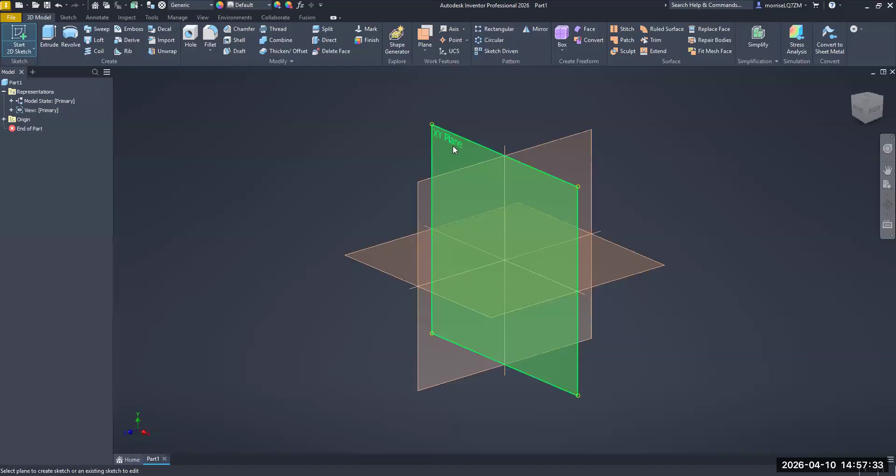All right, so it's finally up, and I'm gonna go to Start 2D Sketch, and I'm gonna click on the XY plane. That's the one that I choose 99.9% of the time. But you can choose whatever plane you wish, because with the view cube up here, for all intents and purposes, you can rotate whatever angle you wish.

I'm gonna go to Circle, Center Point Circle, and I'm going to go to my origin. You see it's going to snap to the origin. It's going to be green. Click it, drag it out. Now, I did this once yesterday for my engineering students. I think I used 4 for the diameter of the shaft. Enter, and I did a right click.

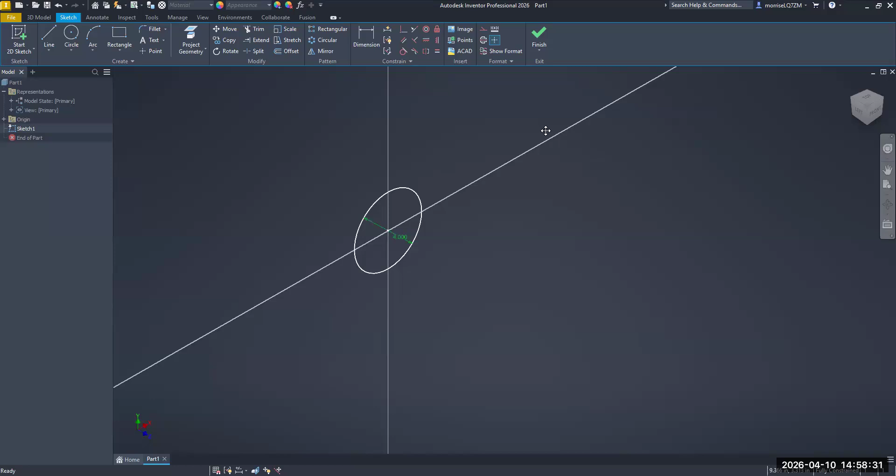Okay. Now you know how to rotate your scroll wheel to zoom in and out, and hold down your scroll wheel to pan. Oops, let me move that out of the way. I'm going to finish the sketch, and I'm going to go to Extrude. And I'm going to make this about 6 inches long. Select OK.

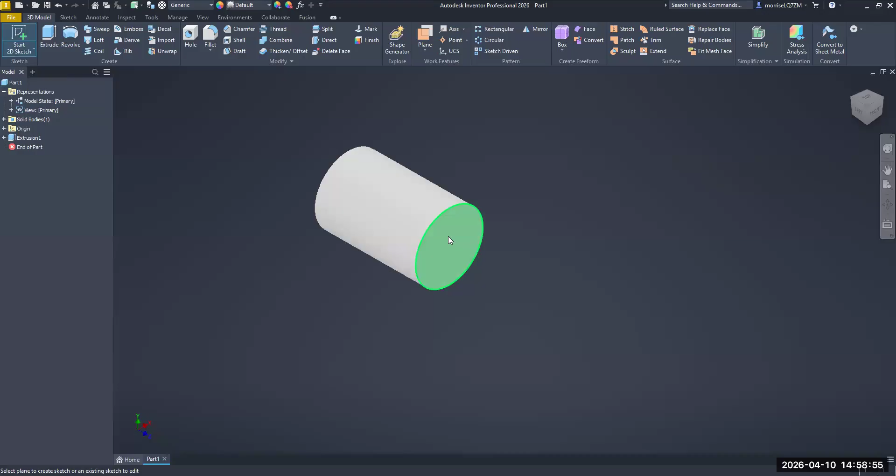All right, now I want to go to Start 2D Sketch, and I'm going to click on this end of the shaft. And I'm going to, again, draw another circle at the center. This is a step shaft. The reason I'm drawing a step shaft is because you can see the greatest stress concentration. That's where the shaft is at its weakest point. And you'll see that when we do the analysis.

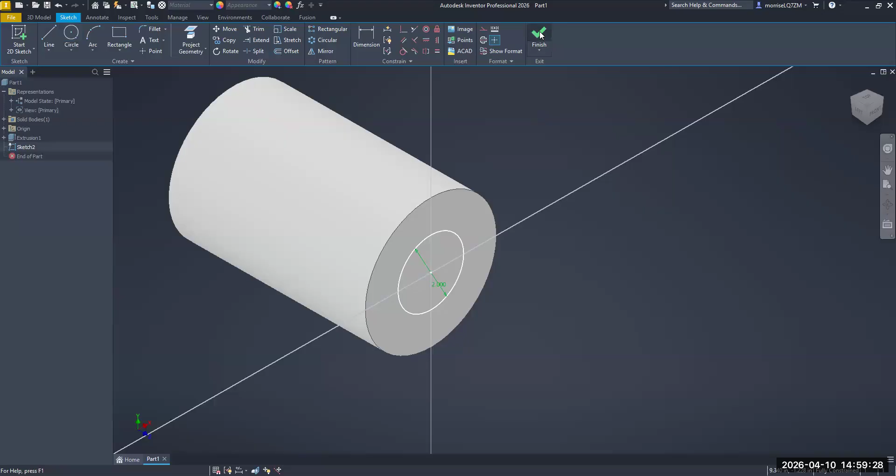All right. So I'm going to make this 2 inches. Okay. And then I'm going to finish the sketch, and I'm going to extrude this. And again, I'm going to leave it 6 inches.

That's nice and convenient. All right, now, for my students here who are going to be engineers one day, and probably most of y'all will end up being an engineer at some point, you notice how we have a sharp corner here? It's a sharp 90. You see that? As a designer, you don't really want to have a sharp 90 sometimes like that, because it makes it weaker. It's not as strong. So one way you can fix that is you can use a fillet.

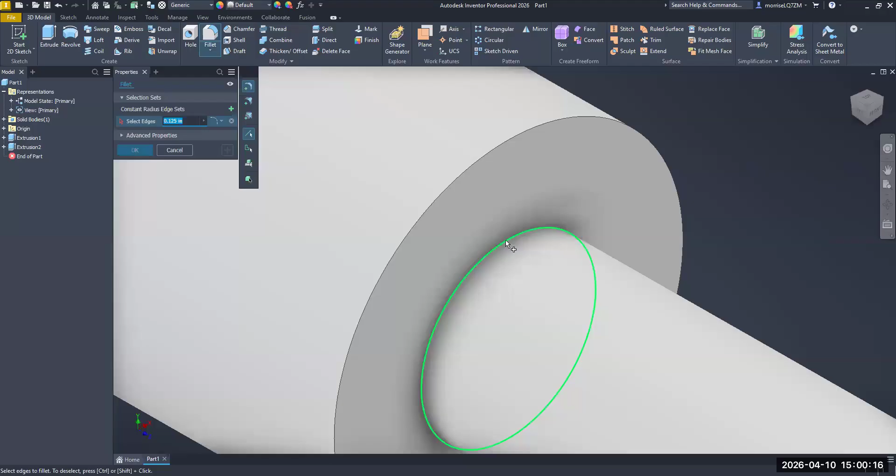Just come and use a fillet, right? And I'm gonna click right here, and y'all have used this before. And I'm gonna select OK. All right, now I'm gonna point out something to you. Why is this stronger than the previous design? Well, look, you've actually got extra material. Look, you come down here. This is what you had before, right? So now you have this little bit of extra material. You see that? And it makes it stronger.

So a lot of times it's in your best interest to not have a sharp corner. Sometimes you have to have a sharp corner, but not always. If you don't have to have a sharp corner, this is probably a better design. All right.

Now, we have this part, a very simple step shaft. I'm gonna go to File, and we have to Save As. And again, you can just call it stepped shaft if you want to. Stepped shaft. Okay. And I'm going to select Save over here. All right. Now this is our part. Sorry, I was kind of favoring this isometric view for some reason.

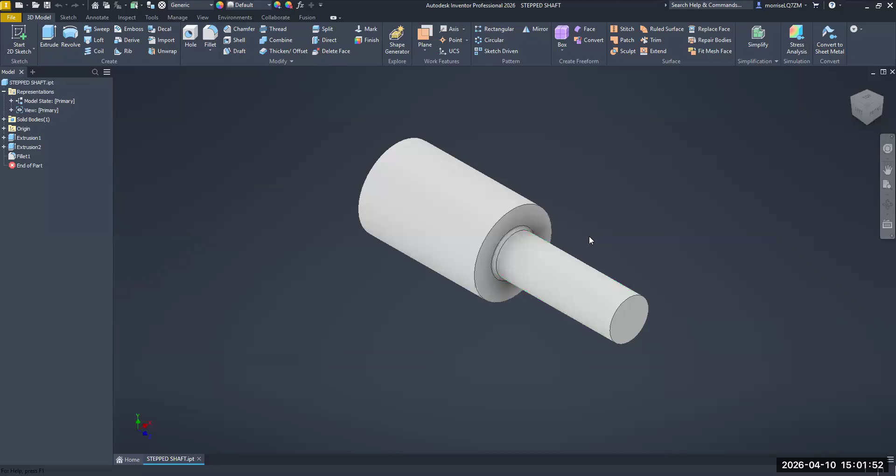You can't do a stress analysis on a part unless you define the material that the part is made of. So in this case, if you were using ABS plastic on a 3D printer, you would select a plastic, ABS plastic, for example. But I'm just going to make mine. Let's say I have a 3D printer or something here that prints metal.

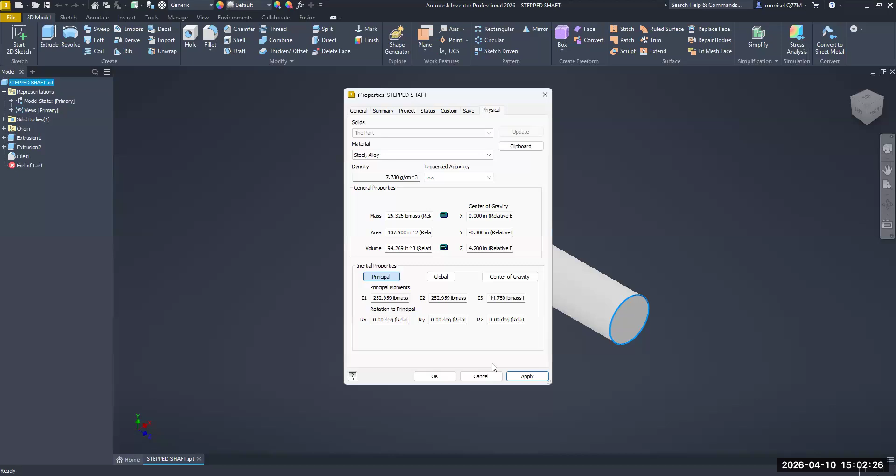I'm going to right click on this, and I'm going to come down to iProperties, and I think all you guys are experts at this now. You can come in here and I'm going to select steel alloy. You can select whatever material you wish. I don't know if you've ever noticed that you get a lot of the mass and area volume properties here. That's also the center of gravity for that part. Okay. And I'm going to apply this and close. Nothing new here. You've seen all this before, and that's great.

Now that I have the material defined, I want to do a stress analysis on it. So I'm going to come up here to, this is new. So you might want to take some cheat notes or shorthand notes. Go to environments. When you go to environments, over to the far left, you'll see something called stress analysis. Click on stress analysis. And then select right here to the left, you're doing a study.

Now, for right now, this panel is more involved, beyond the scope of this class, but we are doing a static analysis here. So everything is fine for right now. Basically, just check off static analysis and select OK. So basically, you're accepting the defaults here.

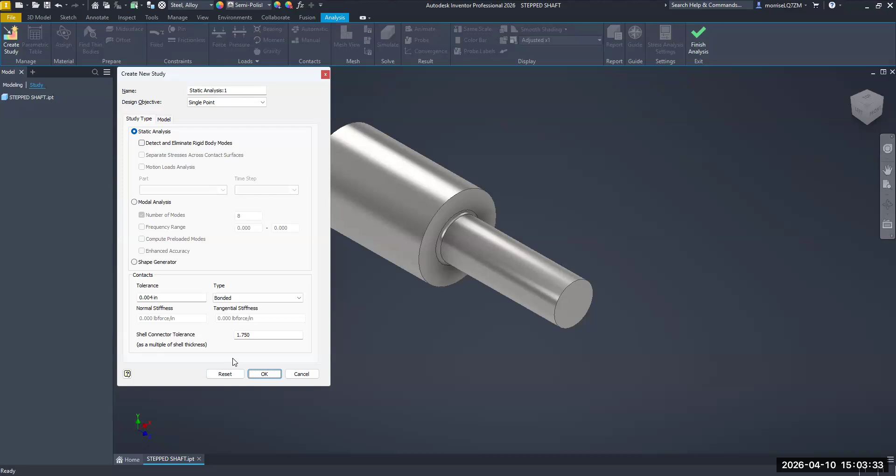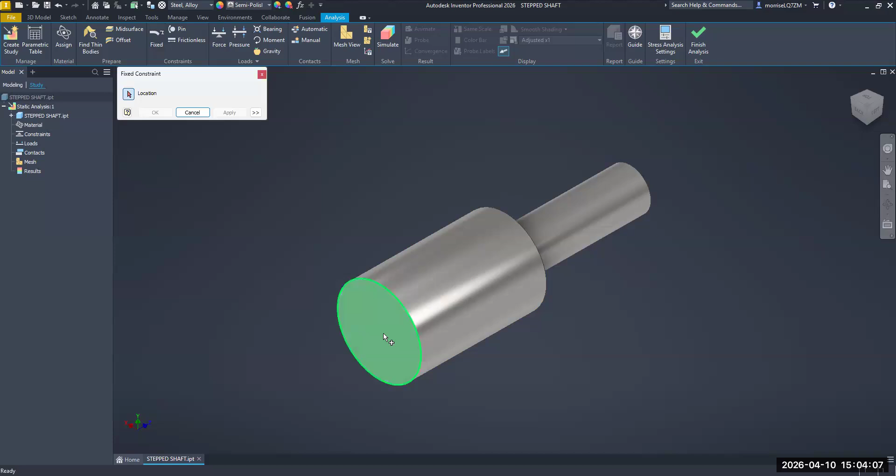All right, now I'm going to do a couple of things with this shaft. The first thing I'm going to do is a tensile test, which means you're pulling on the part, okay? And in order to do this, I have to fix this end. So there is an icon here called fixed. You're constraining it, right? So click on fixed. And if you click here it looks like a little Band-Aid.

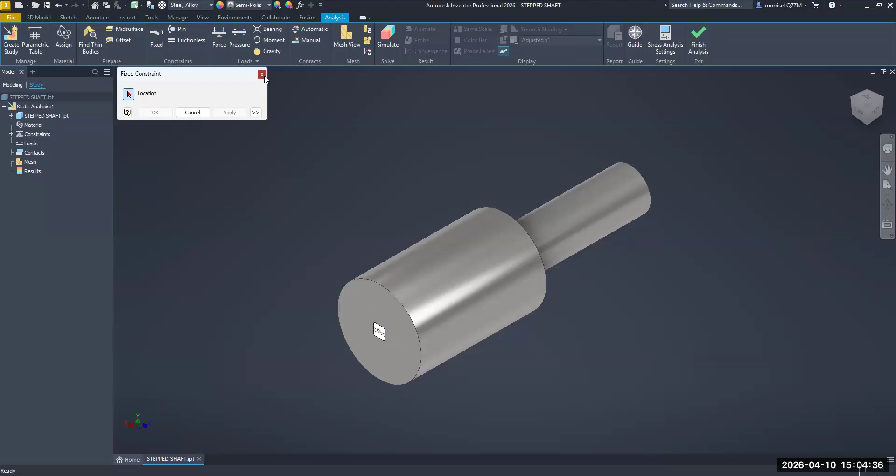What that means is that might be welded to a bulkhead. It could be firmly secured where that's not the weakest point, right? It's welded or it's secure where it cannot move at all. All right, I'm going to select apply. And I'm going to close this out. So there's the little bit. This is fixed.

Now, I want to come in here and apply a mesh view. Now, this would be like if you ever take a class called finite element analysis, you have to break up your part into individual finite elements, which is the grid here. You see a grid? All right. Now, I want to apply a force here at this end. I'm going to do a tensile force first, which is you're pulling.

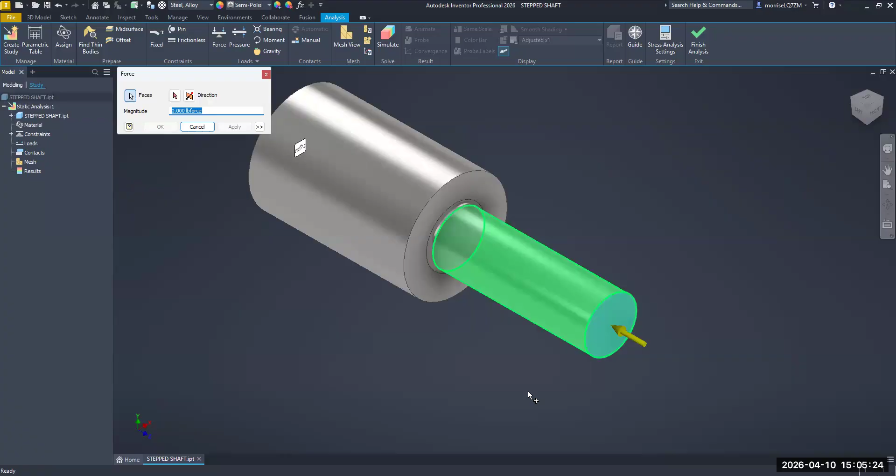So I'm gonna go to force. I'm gonna click right here. All right, now you see the arrow right now is pushing on the part rather than pulling. I'm gonna flip the direction, and I'm gonna put on here a force of maybe 1,000 pounds.

So y'all have taken statics, right? Most of y'all have taken statics in here at some point. Okay. So you understand the meaning of stress. I'm kind of stressed today, but not mathematically stressed.

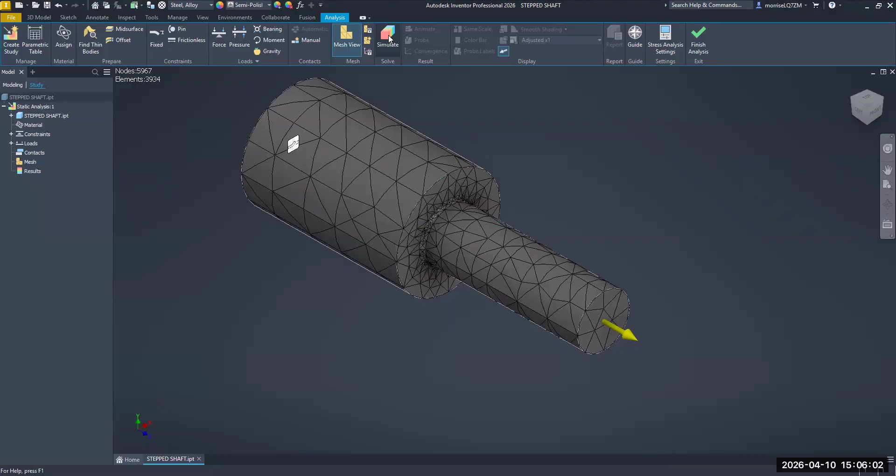Apply and select this. All right. So here you go. Here's the mesh view again. Here's the force. Now we can do a simulation here. Run. All right. I want to show you something. This is called the von Mises stress. For right now, I just want you to look at the color code. The red is the greatest stress that the part's going to see. And it's not too terribly bad.

Okay, so it's 0.6132 KSI. So you have to multiply this by 1,000. All right, so 613 PSI. But now you can do an animation of this. You click on animate, and you can record it as well if you wanted to record your animation. Click here. Select OK.

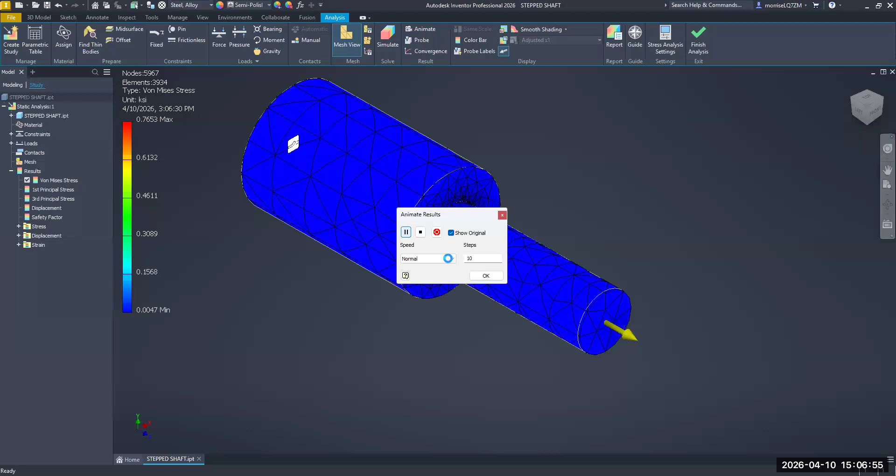I need to do it. Hang on just 1 second. That's it. So it's pulling it, right? It's pulling it. So if you haven't seen this before, this is a very good tool to do some sort of stress analysis on a part.

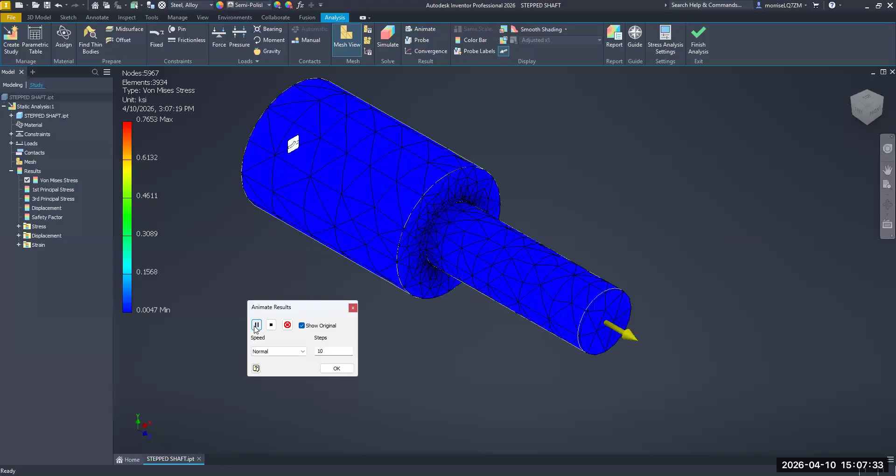Okay. Now, the beauty here is, Mr. Alfredo, you're famous now because your name is mentioned in the video, right?

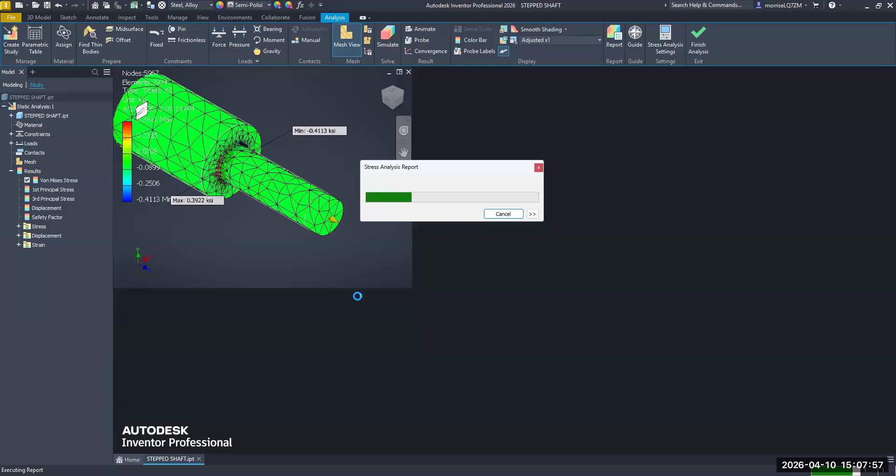If I wanted to create a report here of what I just did, if I come up here to report and say okay, it's generating this nice report that I can submit. You can even put it into a PowerPoint. You can create a PowerPoint and clip all these images and put it in there, okay? It's a slow computer, but, all right, come on, almost there.

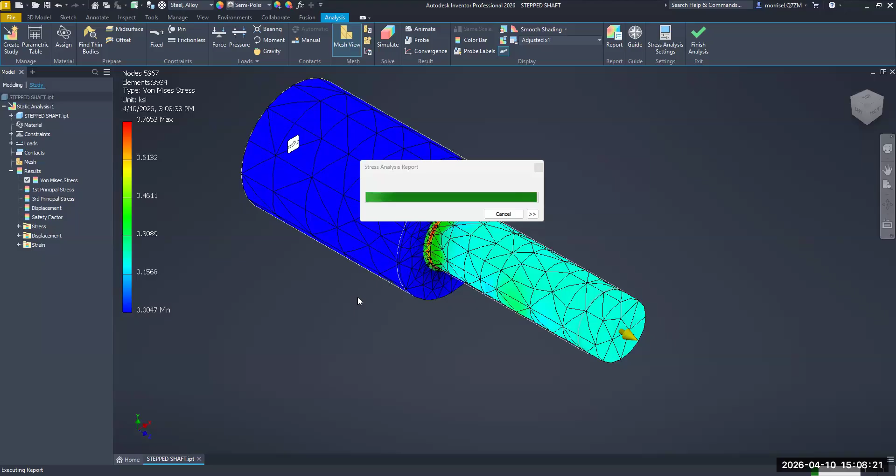All right, look here. You can scroll through this. It gives you all the information about your part. Isn't that cool? Back up here, it gave you what? The designer, the date, material, density, mass, area, volume, the element size of the mesh, material designation and its properties, Young's modulus of elasticity. You have all these pictures that you can cut and paste.

Look, all right, here's all your stresses. Again, this is more for a higher level course, but I think you'll have an appreciation for this later. So you can do a stress analysis of a part. All right, I want to show you one more. I'm going to close out this.

Oops. Wait a minute. Did I close out my Zoom? Please tell me I didn't do that.

All right, I want to stop the share for a minute. Thank goodness I'm still recording. Okay, am I still recording? Yeah, I'm still recording. All right, I'm going to share my screen and go back into Inventor. Sorry about that.

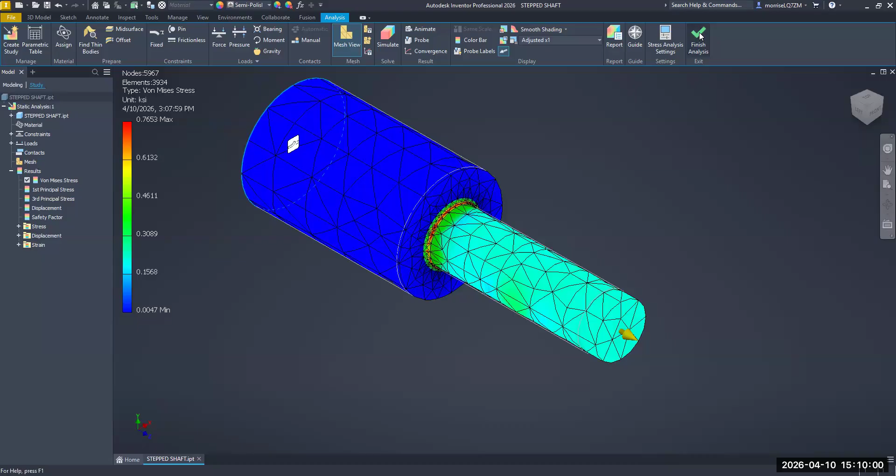All right, so I'm going to finish this analysis. I'm done with this one, right? I would like to do another analysis on this shaft. So I'm gonna come here and go to environments, stress analysis. I want to delete this force. It's gone. The fixed end, I'm going to leave the same here. I'm going to leave the fixed end right here. See that? There's the fixed end. It's still there.

Again, we have our file name. All the material properties are in place. This time I'm going to do torque. So I can click on this end, and you can change the direction. So you're applying a torque, a twisting motion, torsion, right, to this part. And let's say we want, I don't know, 1,000 inch-pounds here. Okay, so force times the distance, right? Force and the distance here. So that's the moment or the torque here. All right, say okay.

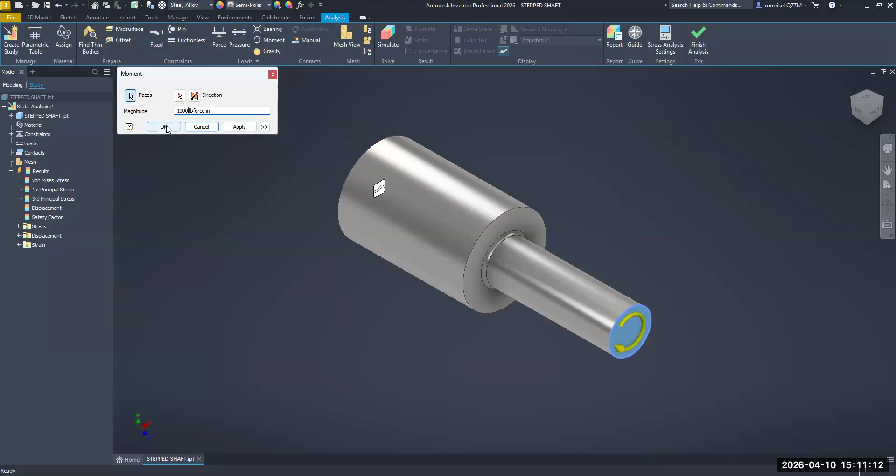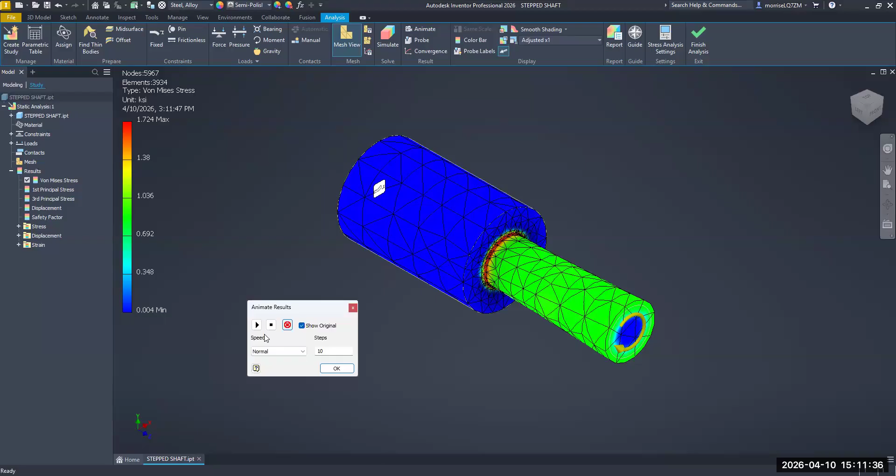I want to turn on the mesh. I'm going to simulate, run. All right, so you see the red again, that's where you see the stress is, like it was earlier. But if you want to do an animation, click on animate. And you can see it's twisting. Okay.

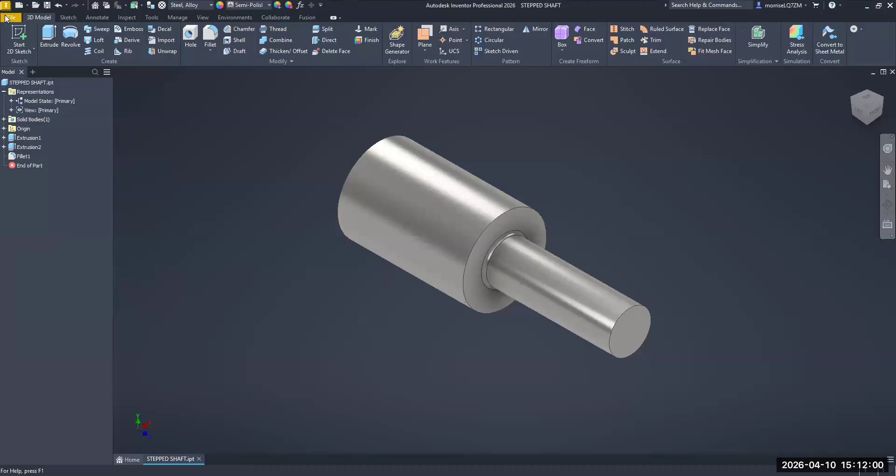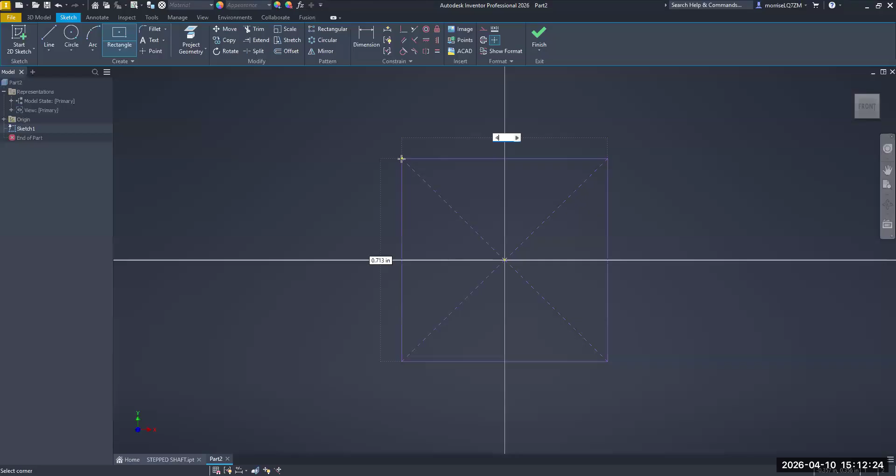I'm going to do one more here, and then I'm going to print out some parts for some 3D printing students. I'm going to close it, finish the analysis. I'm going to go to File, New, English, Standard IPT, Create, Start 2D Sketch. Click on the XY plane. I'm going to go to Rectangle. I'm gonna make this a 4x4 cross section. Do a right click, okay, scroll out, finish the sketch. Now I want to give it some depth. Extrude. We'll go to other direction. Okay, so nothing new here. You've done this before. Start 2D sketch.

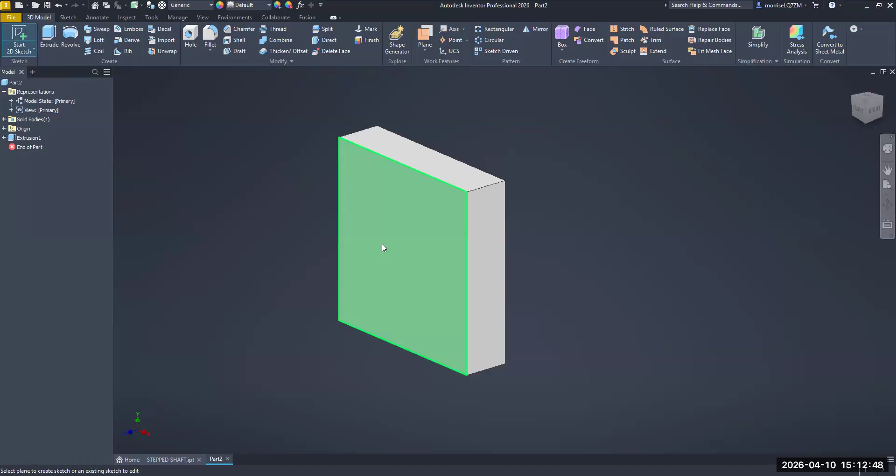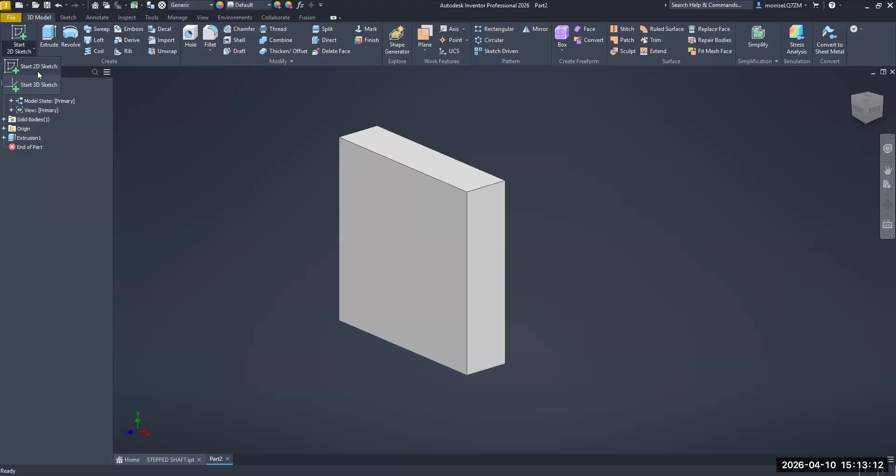Click on this face. Sorry, let me do that again. Okay. I really didn't want to do that. I'm gonna delete this sketch, right click, delete. Guess it's not doing what I want. I'm going to delete that work plane as well. All right, start 2D sketch, click on this face. That's what I wanted. It probably would have worked fine with a work plane, but

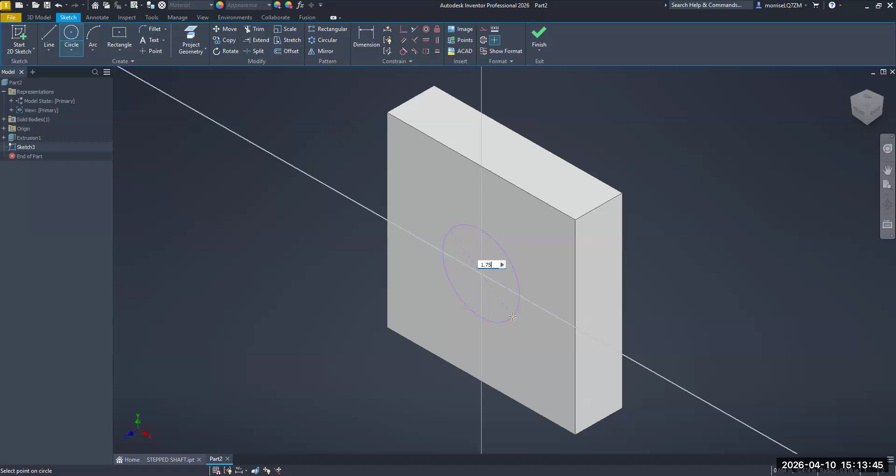I'm going to put a hole through this. And even if you're not an engineering student, I've never been exposed hardly to any of this before, understand that your greatest stress is going to be around where the hole is. That's where the greatest amount of stress would be. We'll make it 1.75. Enter. I'm going to do a right click. Okay. Finish the sketch. Extrude. I'm going to go the other direction. Select OK. I'm going to give this a material designation.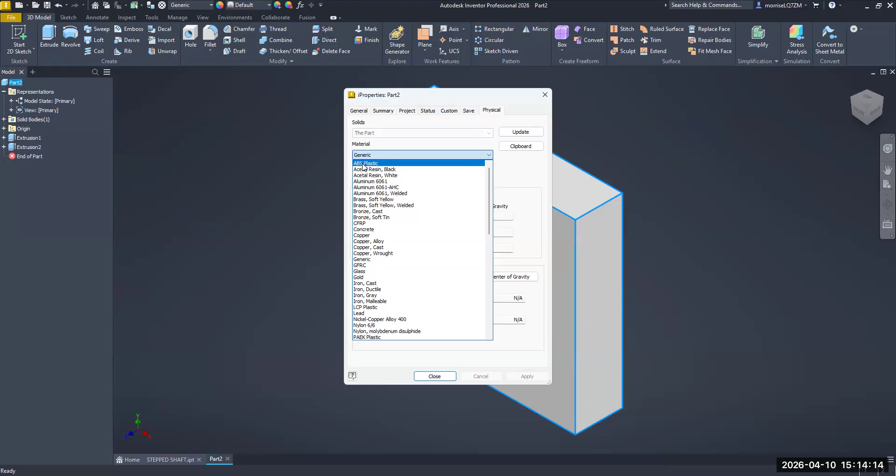Physical. Here's ABS plastic here. A lot of 3D printers use ABS plastic, so I'll do ABS plastic. Here's all the material properties and geometric properties. Apply, close. Okay, so that's ABS. So we have ABS plastic. We're going to go into environments, stress analysis, create a study, select OK. Now we want to anchor one side of this. I'm going to fix this. Say OK.

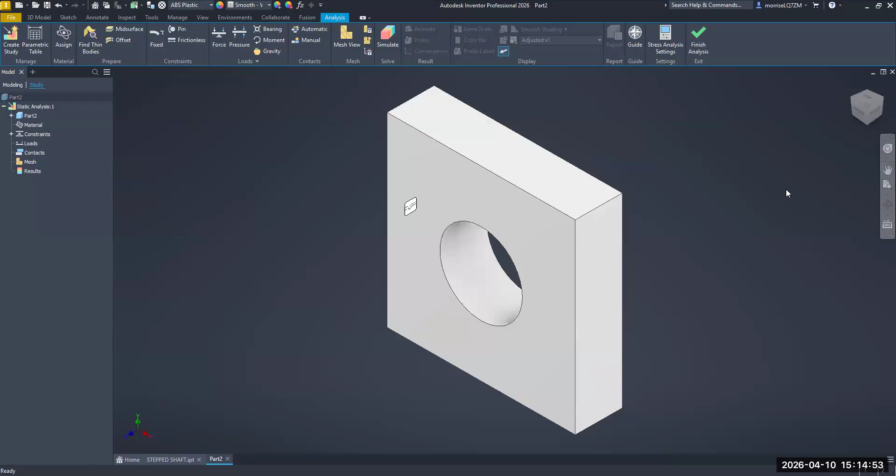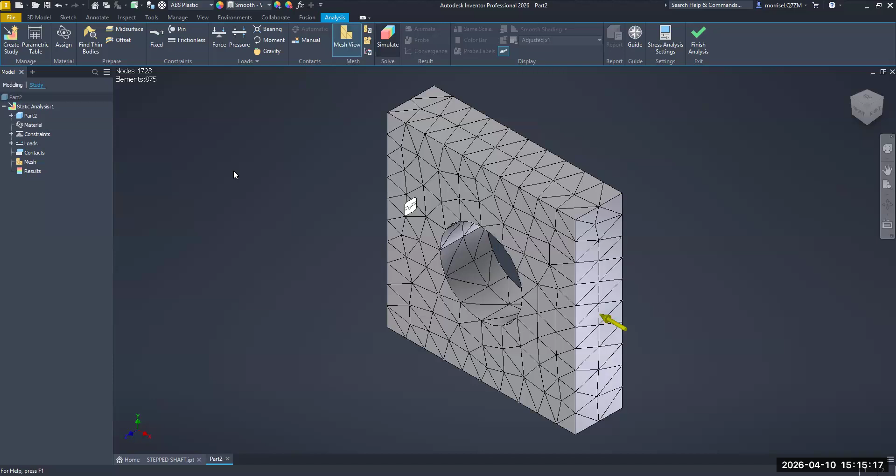Now, just for the fun of it, this time we'll put a force here, but we'll leave it as a compression force, if that's okay. Put 1,000 pounds there, apply, close it out. All right, I'm going to turn on the mesh, and I'm going to do a simulate. And you're going to see the red. That's where your greatest amount of stress is. And then the yellow is the next highest level of stress, and green is getting lower. As you get blue, there's no stress.

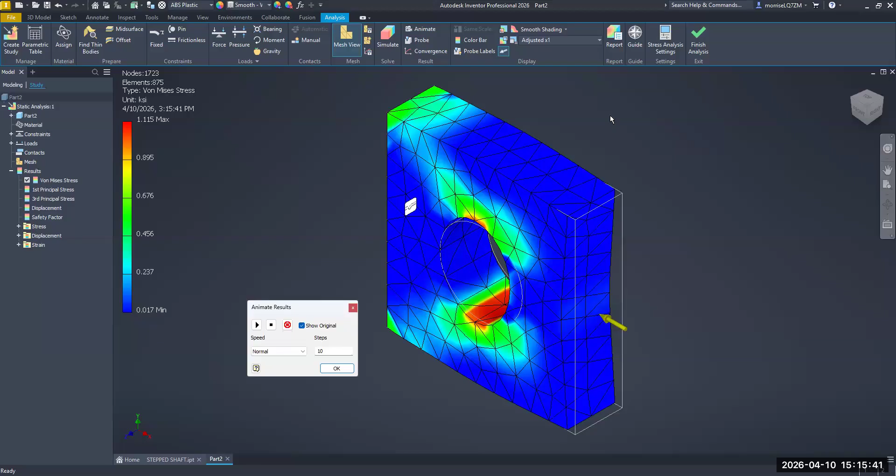All right, now I'm going to do an animate here. You see that one? Okay, so that's doing a compression. I could pull it and do a tensile test. All right, I wanted to show you this because I'm pretty sure next semester, in the fall semester, when I take this independent study in computer aided design, it's an 800 level course, Old Dominion, I'm going to be doing some sort of stress analysis with the computer. So select OK here. We're going to stop this.

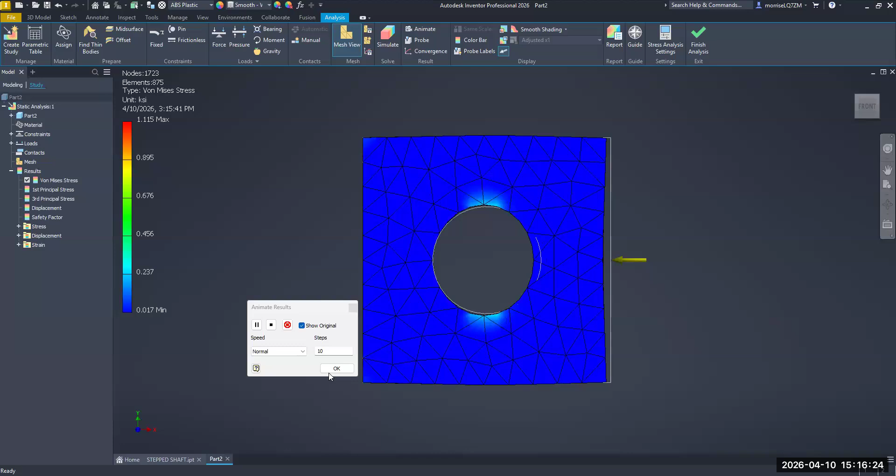I hope you enjoyed this little introduction. Again, you don't have to do an assignment with this. So that's the good news, right?